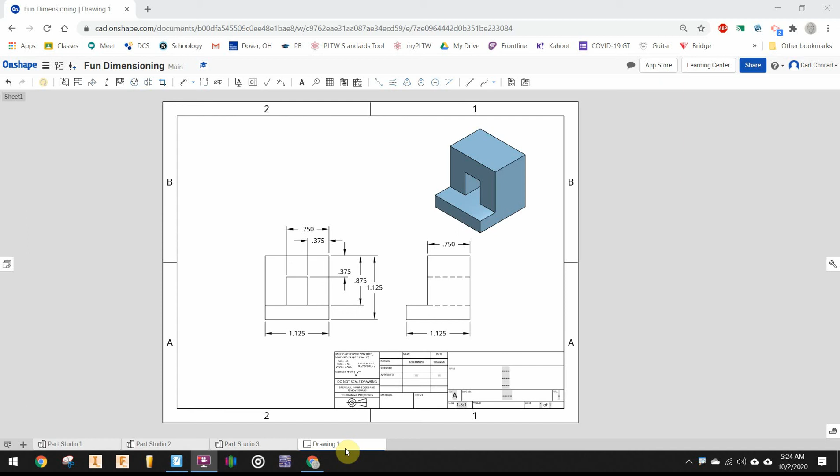I could create another drawing, but you'll notice down here, this is drawing sheet 1 of 1. So what I really want to do is come over here and click on the sheets, and we have an option to add or insert another sheet. So now I have a second piece of paper.

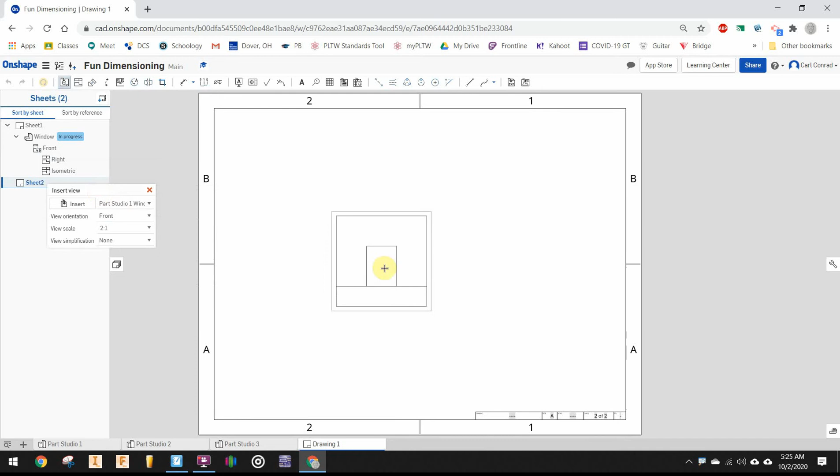Then we'll come up here and do insert view, and it automatically asks, hey, do you want to draw the same part again? No, I don't. So we have to go to insert, and let's find the part we do want to draw, perhaps the round column. Okay, and it wants to make that 2:1 scale again.

Way too big. Let's try, how's 1:1 look? That will work. So we could bring in the front view, the top view.

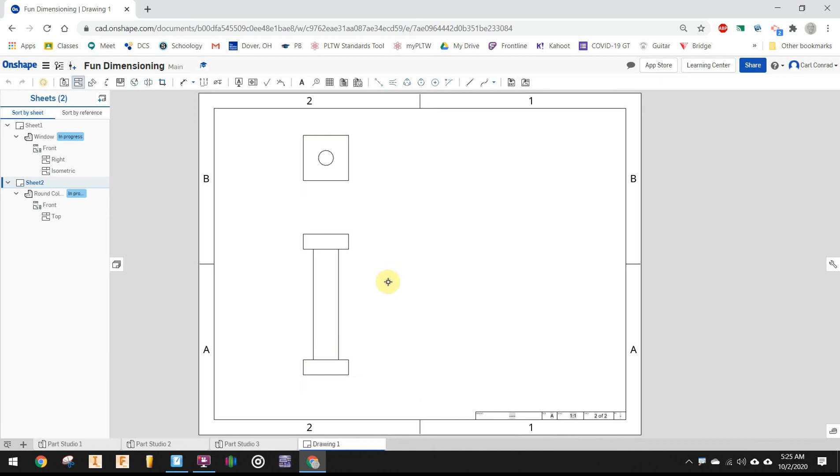I think you can probably already tell the right view and the front view are the same, because it's just squares and they're round. So there's no need at all to have the right view in this case.

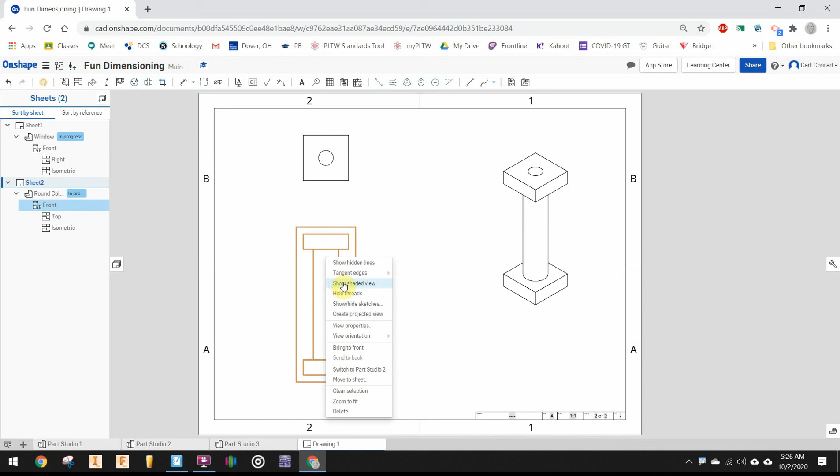And let's get an isometric view. So we'll go ahead and delete that one. And we want to turn on the hidden lines, so let's do show hidden lines. And then on our isometric view, we could show a shaded view.

And now we have just a few more things to add to this because we have circular features. So up here we have a center mark. So we just click at the circle and that will add a center mark.

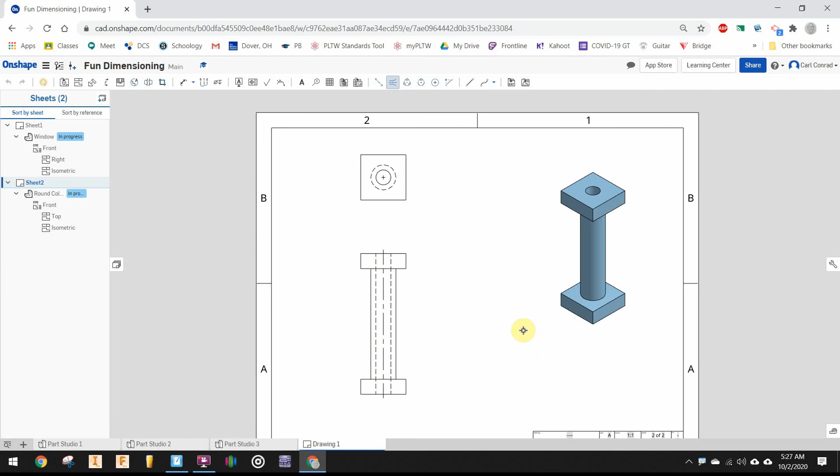And then here is our center line. So we just click on the two edges, the hidden lines for the hole, and that'll give us the center line. Okay, so that's now telling the full story of the part.

So now we just need to add our dimensions. So we'll just make sure we get our widths on there. And what other width would we have? We would have the hole location, so for that we would go to the top view.

You don't dimension a hidden line or a center line. So go to the top view, center point, and then we would have the heights.

So that's all the widths we would have, other than we'll need the circle diameter and the hole diameter. So for heights, we'll go ahead and do those.

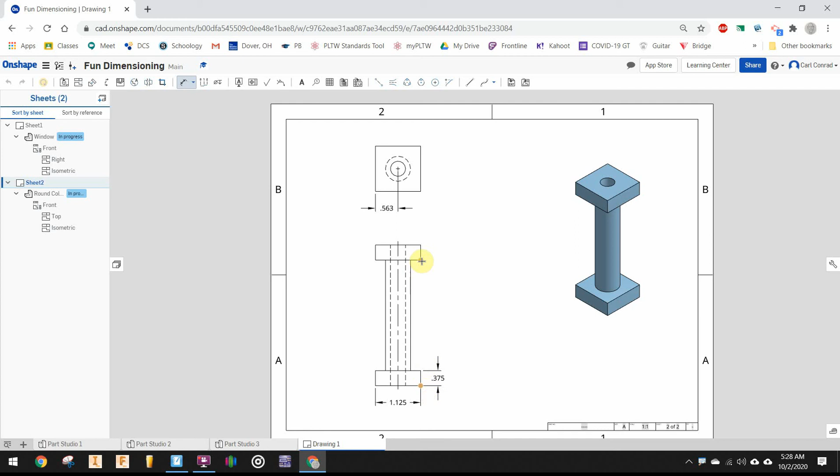And we should have a total of 3 height levels. You'll see it kind of wants to pop and snap when it's in the middle. And we might stagger that one a little bit because it starts to run into the other number.

So what else do we need? We need the full depth. And we need the location of the center point from front to back.

We need the diameter of the cylinder, and actually on the round column you might even want a section view on this, but we haven't learned that yet.

So we're just going to select the two edges down here below and pull that out to create it. But since that is round, we can't see it from the top view.

What we really should do is go ahead and insert a diameter symbol there. Okay, so that helps tell more of the story that, hey, this actually is a diameter.

And on the top, that's a hole. So when I dimension that, of course, I don't want to have that leader line cross other lines. So I'm going to bring that down at like a 60-degree angle.

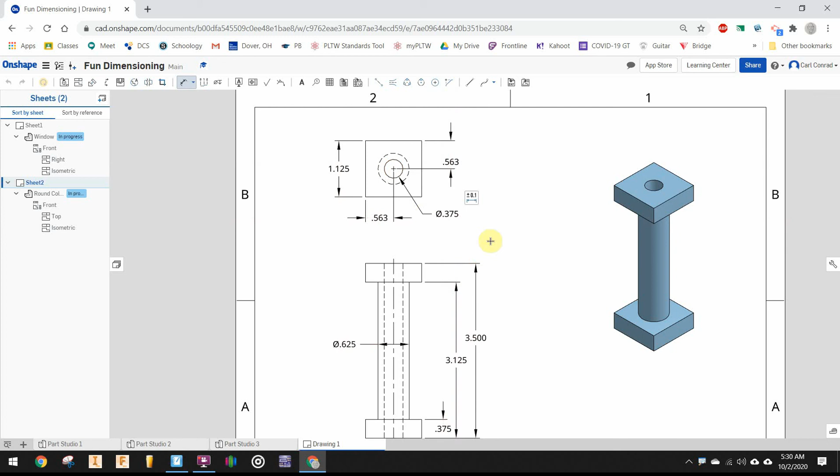And that is not just a circle, that's a hole. So I'm going to need to double click that, and we're going to add some text to that information. Okay, get in the text. There we go. So: 0.375 through.

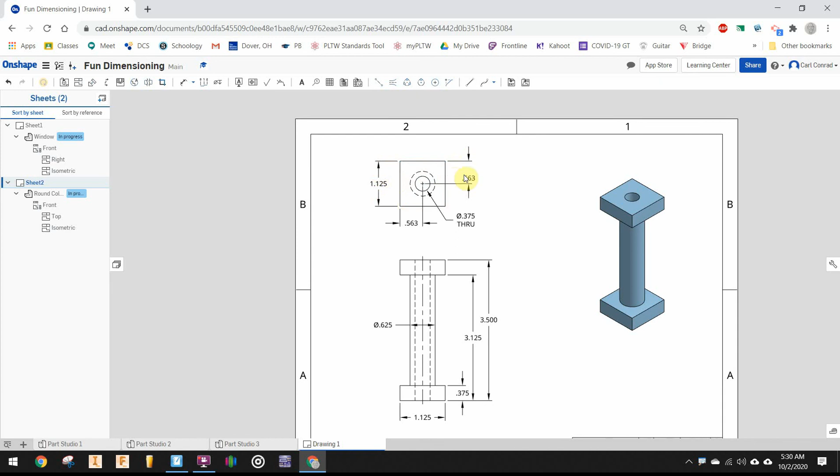So let's just double check. I've got width location, I've got 3 heights, I've got depth location for the hole, and I've also got my hole note saying that that's 3/8 of an inch through.